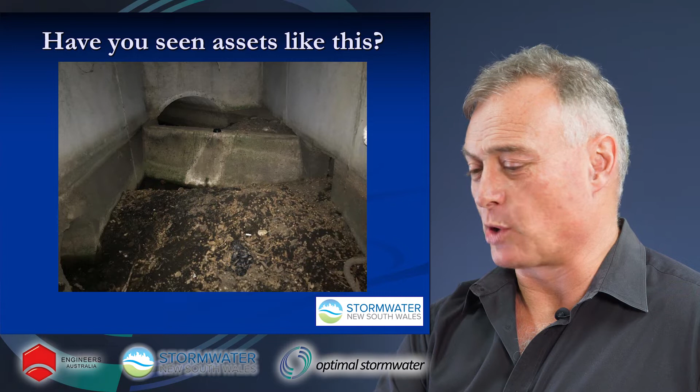Let's see what I mean by it's not -- it's maintenance that's letting us down. Has anyone out there actually seen assets like this? This happens to be a diversion chamber going into an offline CDS gross pollutant trap. Clearly, lack of maintenance -- it's blocked in the inlet, massive overtopping, huge issues.

That's a HumeGard gross pollutant trap where the weir has wedged down and the pollution's all caught on the top of the stays, and the device is non-operational.

That's looking inside an Ecosol at 200% full, 3 models undersized for the catchment and non-operational. That's looking at a trash rack, poorly located, poorly designed. It's been damaged during the maintenance process and all in all poorly maintained.

This is a filter cartridge system designed to be cleaned when the level of sediment gets to about 50 to 100 mils, and clearly in this photo you can see it's way up above the top of the cartridges, and some of the cartridges have come dislodged due to a lack of maintenance.

That happens to be a CDS again with oil all over the surface, but the inlet chute, the little bit above, right in the centre of the device, above the oil, is all blocked. No one's been in, assessed it, cleaned it, etc.

So we're seeing a trend here. Here we've got blocked screens and the surface of the device is completely clean and clear because there's nothing in there. It's resuspending and flushing and the screens remain blocked.

Again, lack of maintenance. Upstream at this particular site there were 2 gross pollutant traps. I got here thinking we'll have to look at increasing the flow and recirculation in the pond, until we realised there was no flow and circulation. Bypassing at both GPTs meant that the pond was getting no water, it was just stagnant and turned a nuclear green. Horrible. If you're all looking at that and thinking that must be paint, you'd be wrong.

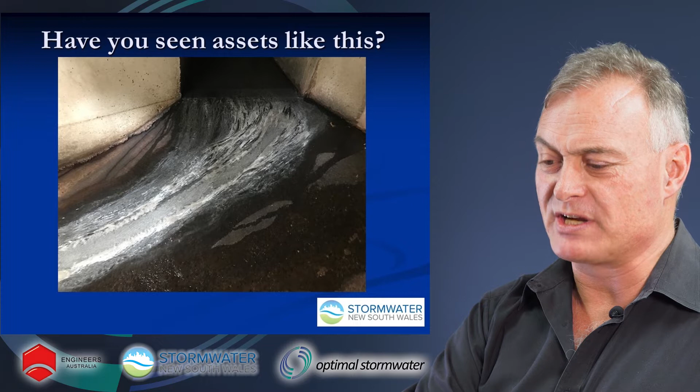That is actually white algae that's coming out of a gross pollutant trap due to not cleaning behind the screens for 10 years, and the anaerobic breakdown has produced very low pH water, very acidic water, and the algae that grows in that is white.

Here's a HumeGard gross pollutant trap that's absolutely full to the top, so much so the pollution is now halfway up their weir. There's evidence of stuff going over the top of their weir, and their weir is wedged down, so the system is both full and non-operational.

Here's a rain garden where there's so much sediment and stuff that's been caught but no cleaning. Sediment's now going around the side of the gutter, as you can see. Plenty of examples, I could go on all day.

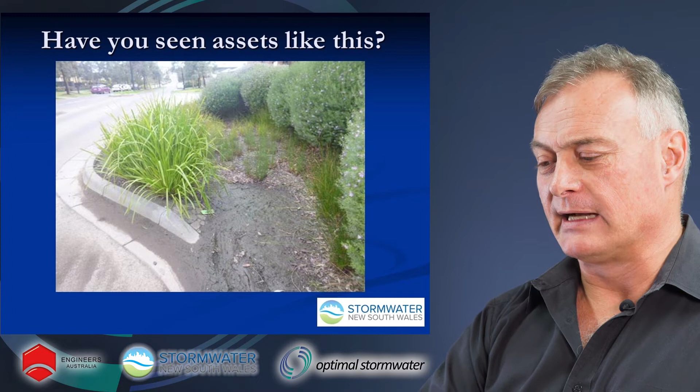I'll finish with this one though. Look at that for a beautiful bioretention system or biodetention basin. Mother would be proud to have that in her backyard. Not. I have thousands of photos of stormwater treatment measures not working, and there's dozens of reasons, and I've not got time to go through them all today.

But the number 1 and 2 reasons are, as you're reading now, lack of knowledge of what each solution needs to keep it working optimally, hence the need for the manual, and a lack of funding to do it. Hopefully the manual will put a lot of thought in a lot of people's minds and help them achieve that level of funding. Okay, so let's get a bit of background.

There's actually plenty of maintenance manuals and design advice for all sorts of wetlands and biofiltration and all sorts of different stormwater treatment techniques. None of them really went far enough. Lots of them were motherhood statements, generic comments, lots of good thought and advice, but not a lot of specific detail. And lots of the assumptions that went with those manuals were that everyone knew what to do and was doing it. Well, I can tell you they were wrong.

The biggest area of failure is in regards to the proprietary devices, because no one really wanted to stand up and tell the industry how to clean somebody else's device. When this whole manual kicked off, I was with the New South Wales EPA, and they weren't prepared to mention the name of the products or the name of the companies that produced them. So how you could provide technical advice on how to correctly maintain a device if you weren't even prepared to say what it was is beyond me.

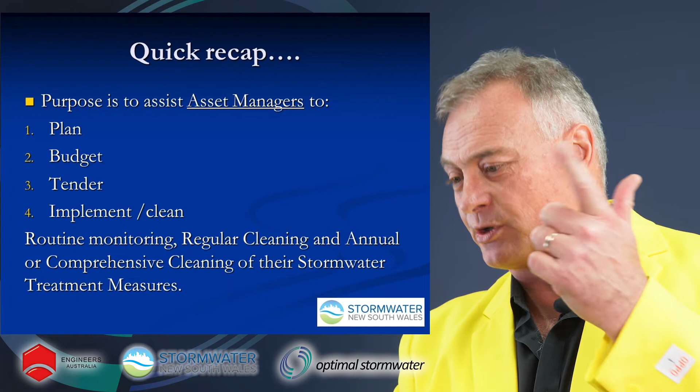But you're not going to be able to do it unless you plan to do it, you budget to do it. Very commonly the council who owns these assets is tendering to do it, and then you actually have to do it. So the purpose of this is to assist asset managers to better understand the maintenance methods, the frequency, the costs, how the cleaning contractors actually think, how to get the best out of your cleaning contractors, and what information, money and support they need to do this.

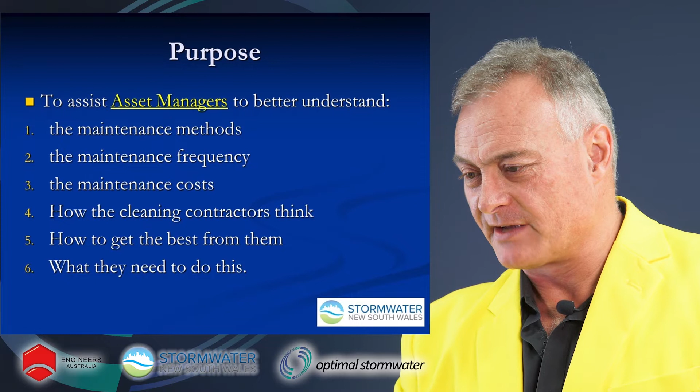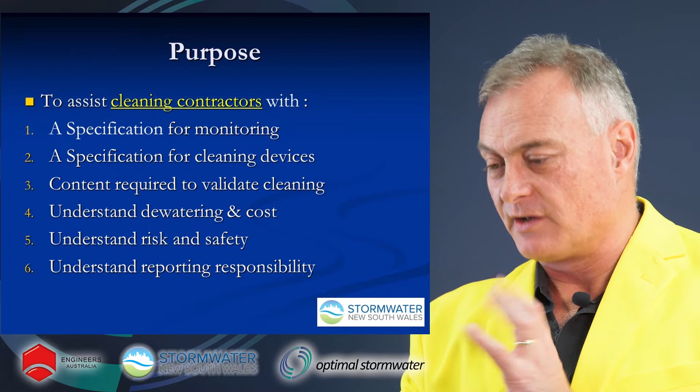So that's for the asset managers that own the devices. The other purpose of this is to assist the cleaning contractors, with a specification for the cleaning and for monitoring, and the content required to actually validate the cleaning and what information councils need reported on their cleaning. Cleaning contractors need to understand dewatering, the costs associated with that, environmental impacts, risk and safety, and obviously reporting responsibilities. So there's an education component in there for the cleaning contractors as well as the asset managers. We're not picking on one, we're educating everyone.

Obviously, there's an introduction. The first step is you have to plan for maintenance. If you're not planning for maintenance, it won't happen. The next little thing that's popped up, and we couldn't get around it, is asset handover. Because very commonly when developers and contractors build these sort of solutions and put them in the ground, there's a historically poor asset management handover of drawings and cleaning specifications that actually get through to the asset owner. That's all covered in a way that we're hopefully looking to improve everyone's handling of this particular problematic section of the industry.

Obviously you need to monitor the devices, and then there's the cleaning and the maintenance. Those are monitoring, small section, cleaning, maintenance, huge. The next thing though is a section on waste management and disposal. Obviously these things pull out tons, or in fact thousands of tons of pollution a year. And obviously if that's going into our landfills, that's not particularly ideal. There's now a couple of companies out there that are reusing, recycling up to 80% of the waste that comes out, and obviously that's the way we want to look into the future.

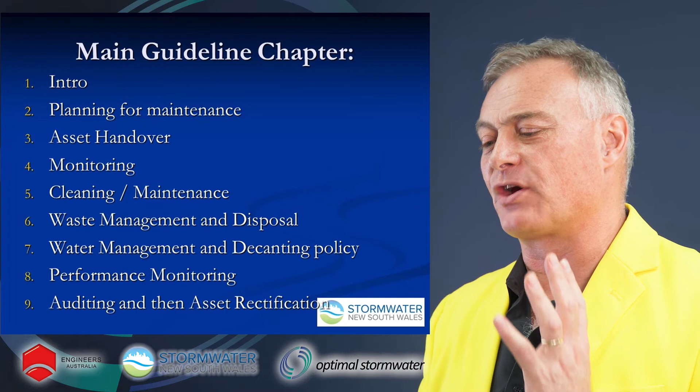Water management and decanting is another big issue. A significant impact of the cost of the cleaning is very commonly in how you deal with the water. So if you've got permanent water in a GPT or a wetland, how do you get rid of it cost effectively so that you can allow the thing to be maintained? Obviously monitoring of performance: your device was designed to do a certain task. Is it doing that or not? Hard to know unless you're doing performance monitoring. It's an absolute minefield. This gives you a good understanding of why it's a minefield and hopefully some good pointers on getting the best outcomes.

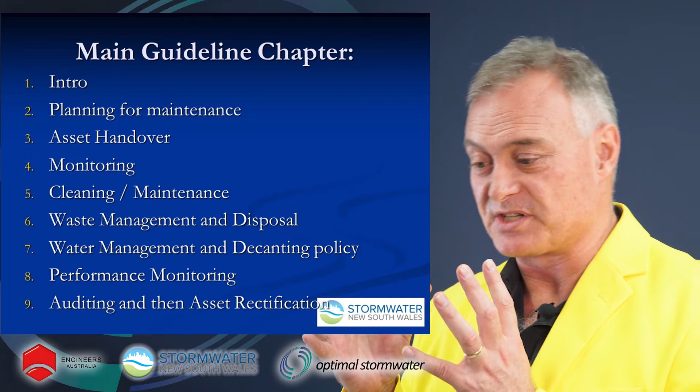Obviously then auditing comes into it, because once you've got all these things in the field, periodically, typically about once a decade, you want to get out there and audit all of them to know what's working, what's not, and why. And if it's not, why not? And can it be fixed? That leads to the last step, obviously, which is asset rectification. In lots of cases devices that were designed back in the 80s, 90s, the noughties weren't taking into account advances in technology made in the last 20 years, and as a result, we can take knowledge from today and retrospectively look at how to fix up some of our older assets.

That will change going forward. Trust me, that's going to change. However, all of these devices are potentially worthy of consideration. Use your knowledge, use your consultants, use the auditing outcomes in the field to know which devices work best for you and your cleaning regime. But there's going to be a one-page cleaning spec for every model of every one of those. Next. Now, for a couple of quick glimpses into the manual itself.

Very simply, if you are going to get in the field, there's a few things you need to know. More of this will come out in the training than by reading the manual. If you don't know what one of these is, you probably haven't been involved in monitoring of stormwater pollution traps before. This is a survey staff. It extends up and up and up. Can't do it in here, I'll hit the roof. But it's a simple tool that all the people out in the field doing this job will need. Does anyone know what this is? If I press that button, yes, that's the signal of a personal gas detector coming on.

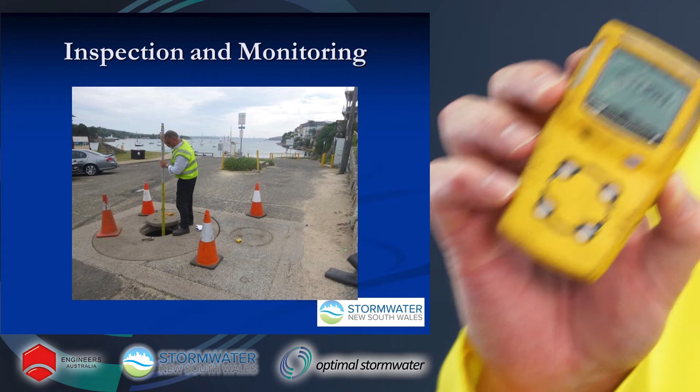There are certain risks with climbing in and inspecting these sort of devices. If you don't know what you're doing, do not get inside one of these things. Get the people trained that need to do it, get them the equipment that they need to do it, and it'll all be fine moving forward. But you can't do anything unless you've got the equipment you need.

So when monitoring and inspecting these sort of devices, there's a whole range of things that need to be taken into account, and you need the tools to actually do the job. So there's a quick list of the tools. It's covered in more detail in the manual. That page there is what's called a data sheet.

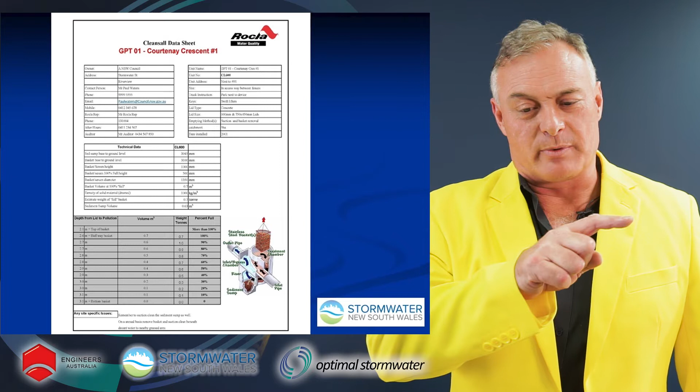As you're looking at it, the upper left is all about the owner's information. The table on the upper right is about the device, its location, its access, its padlocks, its lids, etc. The table in the middle is all the technical information about the product, and the table at the bottom is the bee's knees. That's the one you're very interested in, so I've highlighted that for the next slide.

When you actually turn up to a device and you open the lid and you have your survey staff there and you push it down into the device and you go, I've hit the pollution and it's 4.2 metres. Well, if you don't have a page like this, what does 4.2 metres mean? Does that mean it needs cleaning or it doesn't need cleaning?

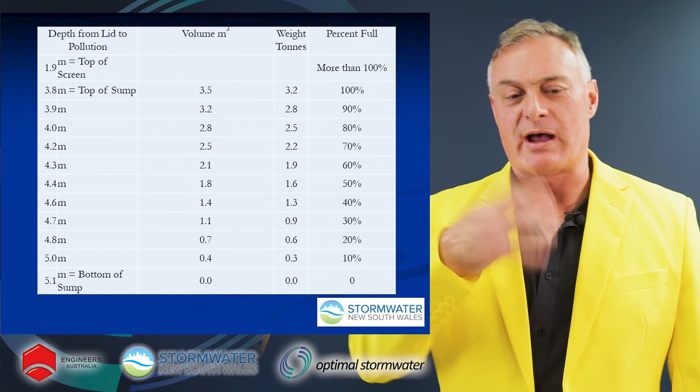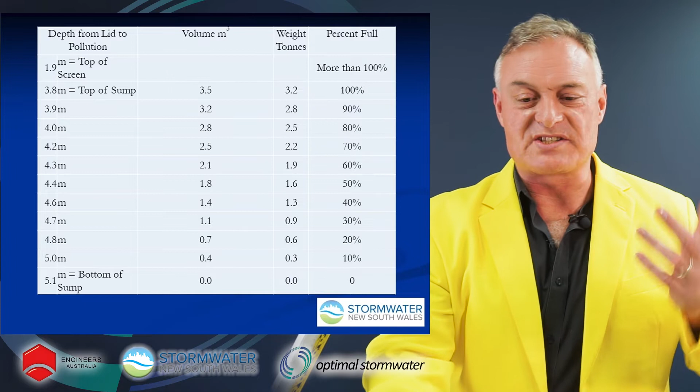If you do have a data sheet, you do have this information, then you'll read down the table on the left-hand side, read 4.2, scroll across to the right and you'll see it says 70%. Great, it's 70% full, I'll come back next month. Without this sort of information, you turn up and you monitor it and you've got data. You don't actually have information. So having the right tools, the physical tools, and obviously the administrative tools are all big steps in making your maintenance challenges a lot easier.

Then we have a big section in Chapter 5 on the maintenance of these, broken up primarily into the primary treatments and secondary treatments. Primary, obviously designed to target litter, organics and coarse sediments. The secondary treatments, typically finer silts, soluble nutrients, bacteria, that sort of stuff.

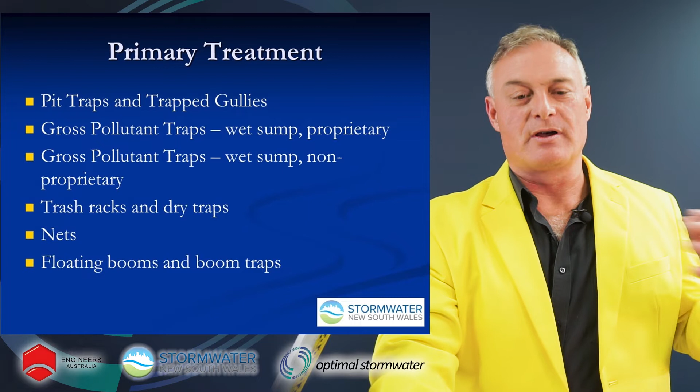So obviously gully pit traps, trap gullies, gross pollutant traps, wet and non-wet, proprietary, non-proprietary, trash racks, dry traps, nets, booms, etc. are all major forms of primary treatment that were never properly covered in any of the previous manuals. Big hole in the industry, this manual fills that hole. For the secondary treatment, there has been a fair bit of information in a couple of very good documents, and those are referred to in our guideline.

But the secondary treatments obviously include permeable paving, oil and sediment separators, cartridge filters, media filters, infiltration basins, swales, ponds and sediment basins, bioretention, rain gardens, and my favourite being constructed wetlands. So they're all excellent forms of secondary treatment. There's lots of good information.

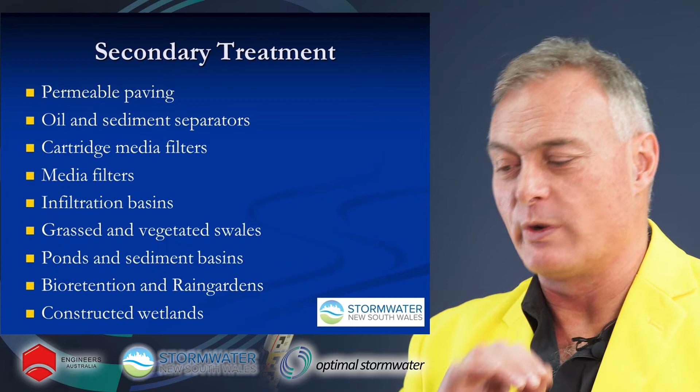We've repeated the best of it in our manual, and we've referred to anywhere that's got better information than we do. We haven't looked to recreate the wheel. We're not looking to copy great work done elsewhere. If there's good work done elsewhere, we'll refer to it and you'll be able to find that elsewhere. But we're here to fill in the holes and give you a good idea about how to actually maintain your assets.

So as I mentioned, the guide's structured where for each one of our assets, we're looking at how you monitor and inspect it, how you do a regular clean, and then how you do an annual or comprehensive clean. But knowing when to do a clean can be quite hard. You need to understand what triggers a clean.

So you have to know what the cleaning triggers are, and they are specific to each individual device, and in some cases, the model of each individual device, hence the one-page cleaning specs. Chapter 6 gets into the EPA advice being to reduce, reuse and recycle, and what we do with waste management.

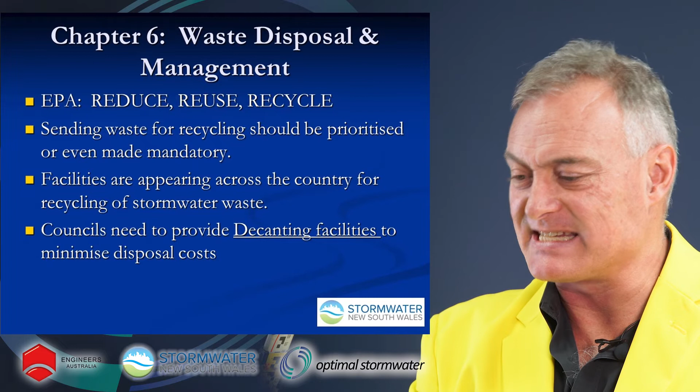One of the biggest things we can do in this regard is looking at decanting facilities to minimise disposal costs. But obviously waste disposal, if we can look at reusing some of the waste we pull out, that's the future. The past is burying it in landfills. The future is trying to recycle 80% or more potentially of what comes out.

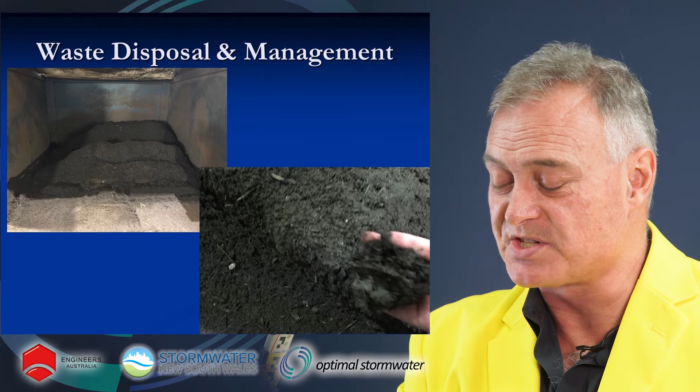That's my hand in the photo on the right, picking this stuff up. It's like beautiful, fluffy topsoil, like soil conditioner. Lovely, no odour, and I'd be happy to spread it around on my lawn. So lots of potential for the reuse of all the sediment and organics that come out of a lot of these measures.

Obviously, Chapter 7, we're looking at water management and what you can actually do, the options. That's a big one in terms of impacting cost. Where we can discharge to sewer, that's probably the best and most environmental outcome, but needless to say, most sewage authorities aren't interested. Decanting on site, in some places works well, in others you can get community feedback that you don't want, etc. Obviously, decanting back into the device upon completion is an option, especially for smaller ones.

Decanting to an agreed irrigation area, certainly that's going to work well for country areas. Decanting at a council decanting facility is going to save you money if city councils can look at producing those facilities for their cleaning guys. And obviously pumping to a mobile or portable on-site treatment facility, if you've got no other options, does provide an environmental outcome that should be acceptable.

Decanting on site to a grassed irrigation area is probably the cheapest, fastest, easiest, but you need to know what to do, and we've got 4 pages of advice to make sure you don't get yourself in trouble in that regard.

Auditing of these traps is the next section, where you actually ascertain the depth, the volume, the dimensions for each type of device. Obviously, key access information, keys, catchment area, the owner's contacts, etc. Everything you need to know about the device. Obviously, site-specific information such as traffic management, backwater, dewatering, tidal flows, low flows, decanting options, etc. can all come out of the audit, because now you know everything about your devices. And obviously the auditing allows the creation of data sheets.

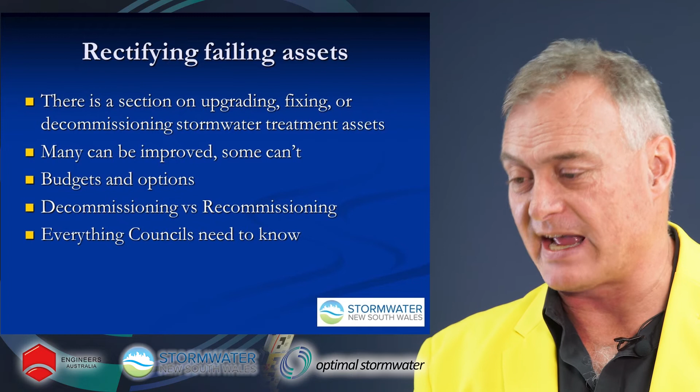Right, rectifying failing assets. Some of them aren't going to work ever. They were just a bad decision by someone in the past. Many can actually be improved. Obviously, we need to look at options and budgets for that. Sometimes you can decommission, sometimes you can recommission. Maybe a matter of ripping out old screens that don't work and putting in some new ones that actually will. There's everything council needs to know about rectifying their failing assets and improving them, making use out of the assets that are actually in the ground. And obviously, one-page cleaning specifications are in the back, as I mentioned.

So, when's it available? Well, it's available upon sign up to the training course. So, a copy of the guidelines will be sent to you so you can start using it immediately once you've signed up for the training course. Obviously, the trainings have been delayed by COVID. Thank you very much. We're all sitting in little COVID coves and caves at home, going quietly mad. But hopefully in July, these trainings will be able to start in earnest. I'll be one of the presenters, and it's a full-day course, and your guys will walk in with some knowledge and leave knowing just about everything.

Obviously, once the organisation has a copy of the guidelines, you can share it amongst yourselves. What we don't want to see is the document have one PDF copy and then it sits on the shelves. Obviously, we want you to use the appendices, the individual PDFs, for your benefit, and I'll keep moving on. Obviously, trainings are going to be done in major cities and also several in key regional areas. So it shouldn't be too far or hard for people to get to that. Now, if you're not in New South Wales at the moment, don't worry. It's not the end of the world. I expect by December this manual will have its first revision, and with any luck it'll actually turn from a New South Wales document to a national document.

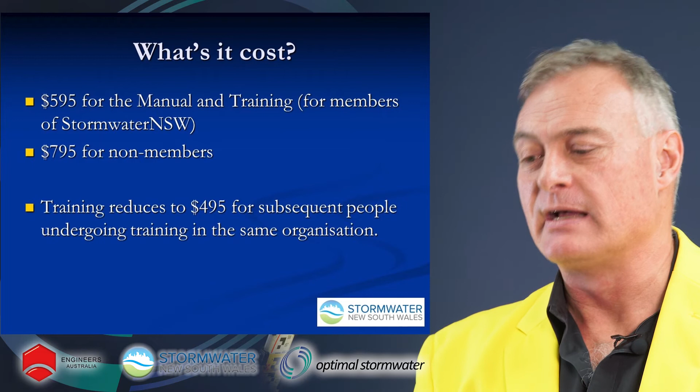So what's it cost? Well, it's going to cost $595 if you're a member of the Stormwater New South Wales family. If you're not, there's another couple hundred dollars in it. Obviously, once you have the manual, you don't need multiple copies. You've already got it electronically. You can share it amongst others in your organisation, and subsequent people can be trained at a lower rate.

Do you have to get training? I'm anticipating some of your questions. No, it's not mandatory. You don't have to. But if you want to get the most from your internal staff, if you're the asset manager, or your cleaning staff, if you're the cleaning boss, then obviously getting them trained up is going to give you a big head start, and they'll understand how the traps work and they'll be able to do their job better.

Also, it's likely councils will include in tenders the following statement: at least one person actually on site doing the cleaning has to have done the training that accompanies these guidelines. I expect that councils will require you to clean in accordance with the guidelines, which you can't do if you've never read the guidelines. So they'll want to get validation that your cleaning people on the ground have actually done the training course. And hopefully that'll stop it being used as something to sit on the shelf.

Okay, people will ask, what about new devices? They're thinking about something brand new and I want to trial it. How do I get it into the manual? Every year, proprietors will be encouraged to develop and improve their devices. They always have. There's some significant evolution in our industry in the past 12 months. Very happy to see it. And those devices will all be in the first edition. So as things change, the cleaning advice will also be changed and updated.

And anyone can contact Stormwater New South Wales and have their device included. It's not a problem. It's not complicated. We'll ask you for a certain amount of information and some drawings. It's not going to be onerous. That advice will be sent through. This manual is not about saying which GPT or which stormwater treatment measure is better. It's about how to clean whichever one you've got.